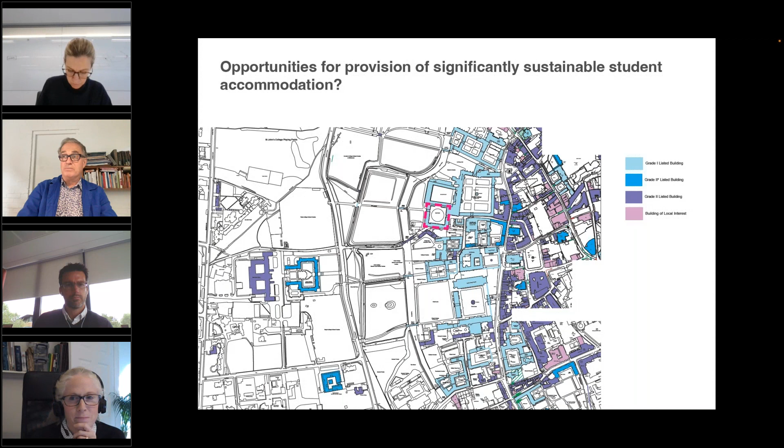So over a process of three years, we worked with the college, Historic England, and the local conservation officers to work out how you do this, what might be an appropriate methodology, how you evaluate the existing building in terms of retrofit options, and how you optimize the solutions. I'm going to give you a brief overview of what the project was about.

We wanted to provide 21st century rooms within the historic interiors—21st century in terms of expectations of character and comfort. We wanted to renew the fabric of the building, particularly the facades, because over the previous 180 years there hadn't been a lot of care applied to those.

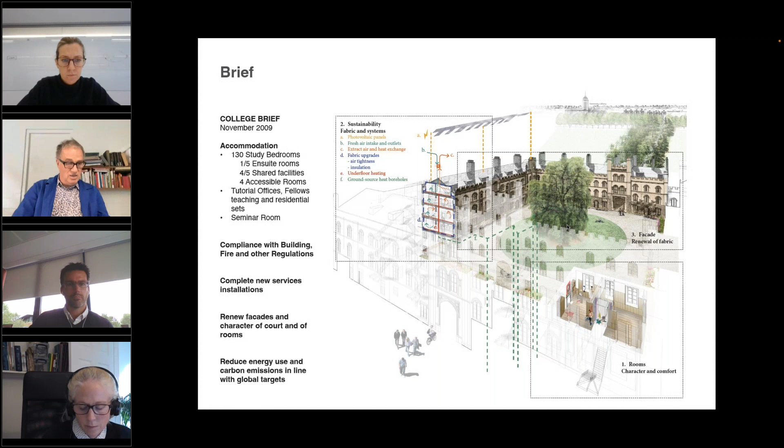But principally, the college wanted to explore the potential for sustainability of the fabric and the systems, from a fabric-first approach to demand reduction, to improving the efficiency of the services in the building, and ultimately to providing renewable energy sources.

The target we set ourselves was to take the existing carbon emissions, halve the demand through fabric improvement, double the efficiency of the system, and then halve the carbon in the supply of energy to those systems. That got us to about an eighth, which in 2010 was actually the target we were asked to aim for.

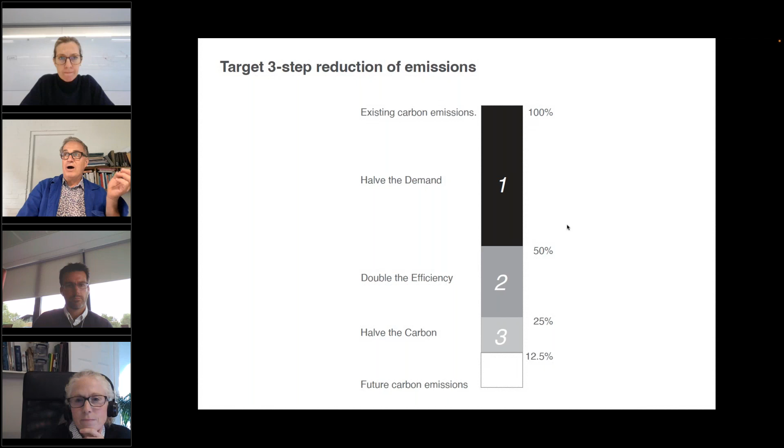The strategy, in terms of design and interventions in fabric, was to insulate the fabric, double glaze or triple glaze windows if we could, make the building airtight, but introduce mechanical ventilation with heat recovery, using the chimneys as the supply ducts to every room.

At that point, having reduced the heat loss to a point that we could heat the rooms with underfloor heating laid under the existing historic floorboards, we'd then provide heat from a ground source heat pump and borehole array. That's the bit that hasn't been done yet—the college will undertake that fairly shortly. By the time we'd finished, they were suffering from disruption fatigue, so that's yet to be done.

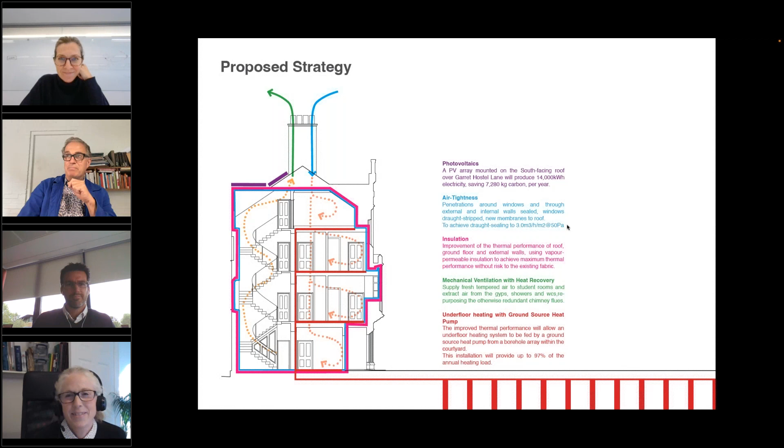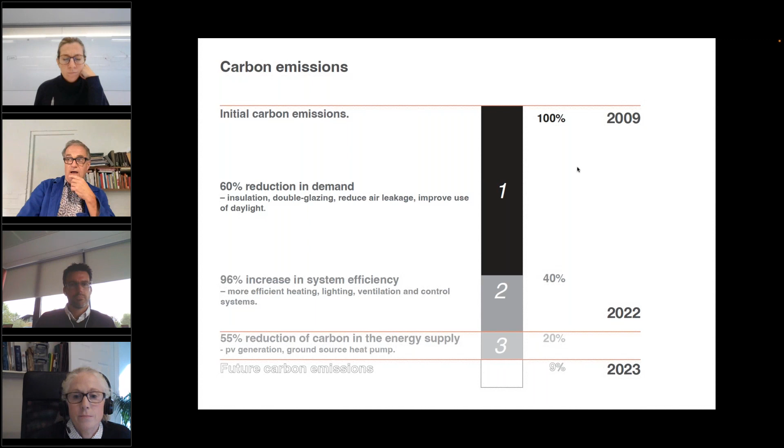What we actually achieved was a 60% reduction in demand. We didn't quite manage to double the system efficiency—in 2022 we're at something like 20%. The college have reported that energy demand and carbon emissions have been reduced by 80%. So when we get those boreholes in, things will improve even more.

In terms of other outcomes, the rooms are really popular—80% of students say they'd recommend those rooms to others, and it's the nicest place to live in college. In terms of performance—a slight digression on badges—we didn't go for Passive House or BREEAM because we wanted to really evaluate how the existing building operated before adopting targets for it.

The targets for each of those elements, walls, windows, whatever, were determined by what was appropriate to achieve in the context of the listed status of the building and the retention of as much historic fabric as was possible. So although we didn't meet the elemental requirements for quite a lot of the EnerPHit targets, in terms of outcome and kilowatt hours per metre squared per year, we're just below the EnerPHit Table 3 target. So I think badges can be quite a dangerous thing to adopt if you're retrofitting heritage.

They set targets for things which really need to be explored on an individual basis. And actually, we're finding that increasingly the targets that clients want to set are those established through SALIX, the Public Sector Decarbonisation Scheme, and there you're talking about pounds per tonne of carbon saved over a lifetime, which actually works pretty well for things with a very long lifetime, like insulation.

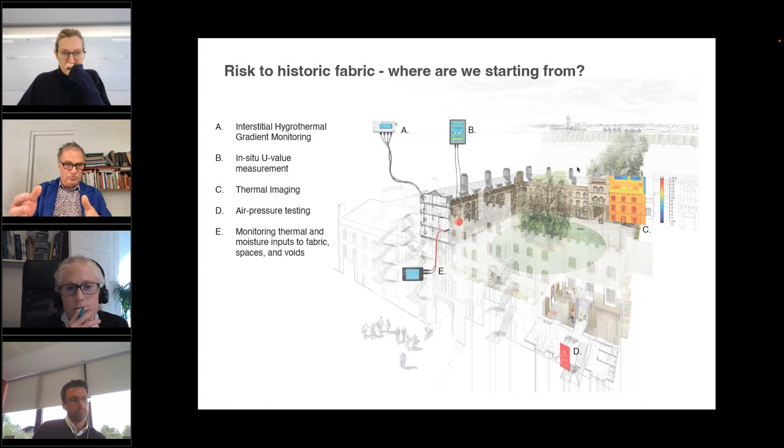And then we monitored the thermal and moisture inputs to the fabric in the rooms themselves and in the spaces between the rooms. So what happened when all the students came back, what happened when the heating went on, what happened when the students went away in the depths of winter, all that stuff. We needed to understand how that all worked.

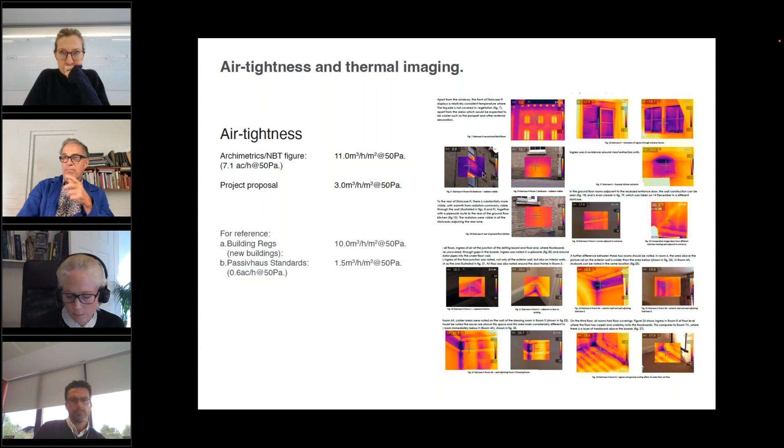In terms of air tightness, we arrived at a figure of about 11 cubic meters per meter square at 50 pascals, and we were aiming at 3. So that's a lot better than the building regs, but short of Passive House. You can see radiators through brick walls, such was the nature of the performance. But this is fairly standard thermal imaging outcomes for an unimproved building.

I think the critical lesson I learned through this was that if you do a standard U-value calculation for these walls, you come up with a U-value of somewhere around 0.95, nearly 1. If you actually measure it, you're closer to 0.7, and in some cases 0.6. So that's a 25% difference between the measured and the calculated U-values.

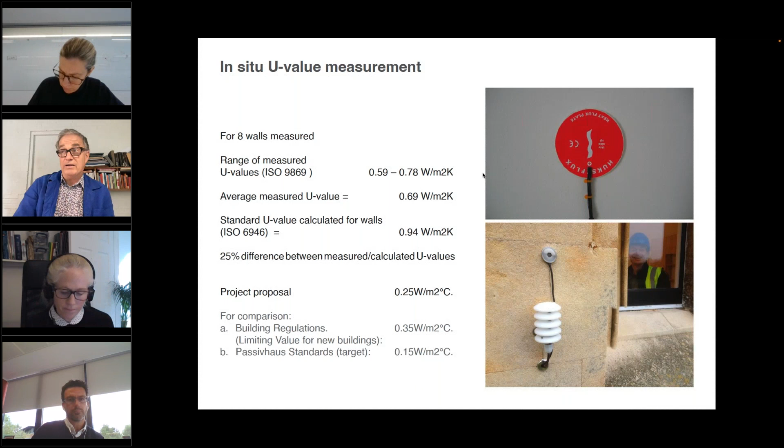And given the sensitivity of historic fabric to being internally insulated, which in this project was the only option we had, that's a big difference. You get a lot closer to your target than you would have imagined if you'd simply done a desktop exercise. You'd have put too much insulation in and incurred too much risk, I think.

The hygrothermal gradient monitoring just showed us whether we had existing dew points within the fabric, and that formed the basis of some of the WUFI modeling we did later on. I'll come on to that if we have time.

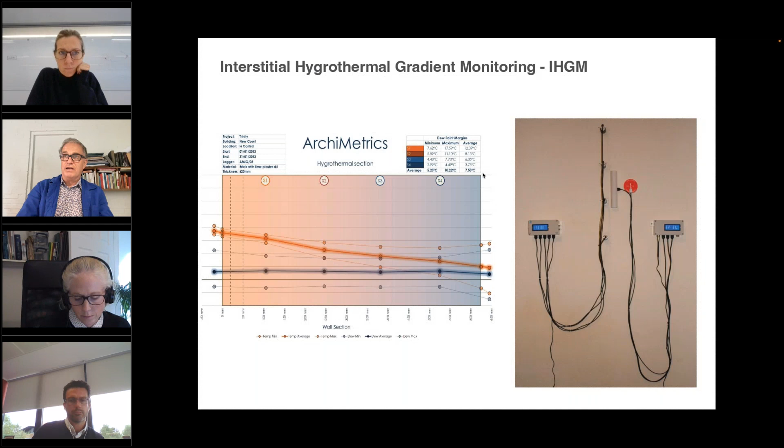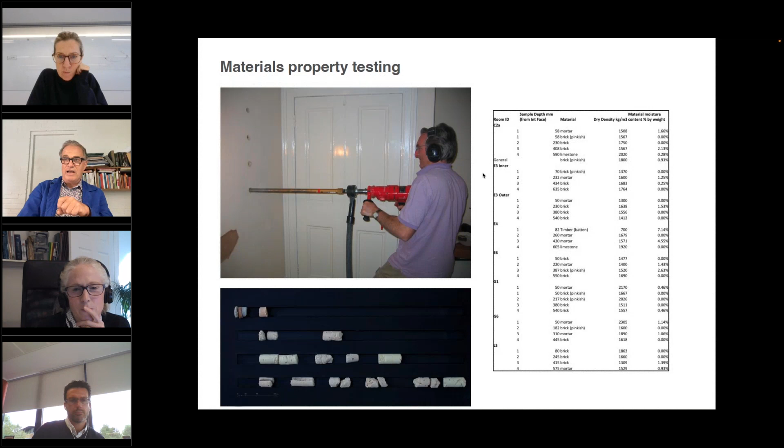Materials property testing was quite intrusive, but gave us useful core samples that we could send off for analysis in terms of the exact material properties. The input from the moisture and thermal monitoring didn't reveal anything we couldn't have imagined, but we had no way of knowing that before we did the monitoring.

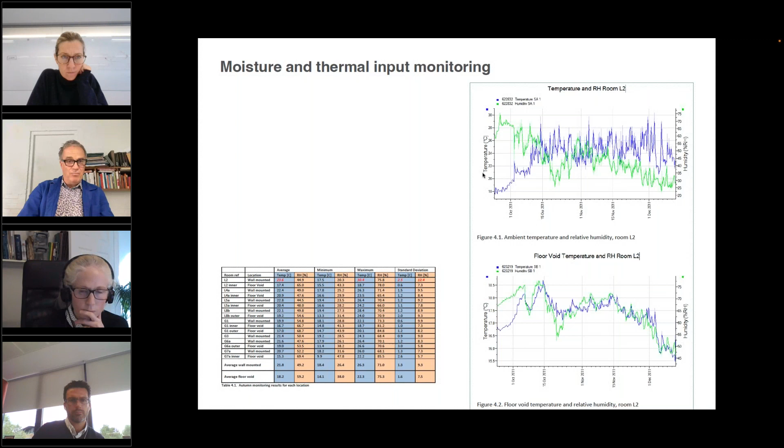In terms of the other risks, like architectural character and heritage, obviously we did all of the stuff you do in terms of looking at the fabric and the particularities of the fabric.

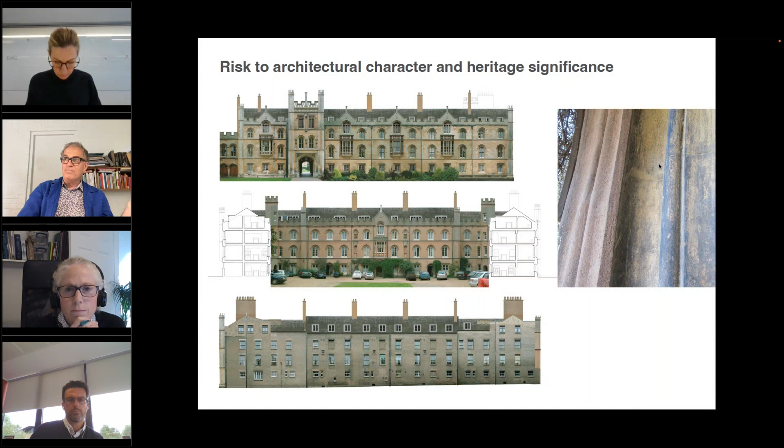This building had been over-rendered with Portland cement render in the 70s, and they had tried to match the color of the exposed Roman render, ignoring the fact that originally it had an overwash of lime wash of something much warmer in color. So we were looking to rectify that.

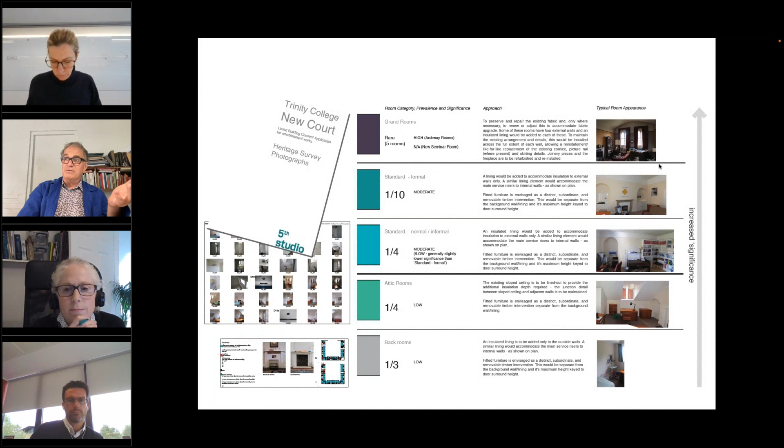We did lots of stuff you're expected to do by Historic England about features and fabric particularities, but also categorizing how many really special rooms there are, and how the largest part are pretty bog standard rooms that have been destroyed by iterative interventions. What we came to was the realization that the most important heritage significance of this building was the robust way it adapted itself to use by each successive generation of students.

So in the summer, the building would be cleaned out of all the soot of inhabitation and then occupied again. Its resilience to that kind of annual reoccupation and inhabitation by a new generation of students was the most critical aspect of its heritage significance.

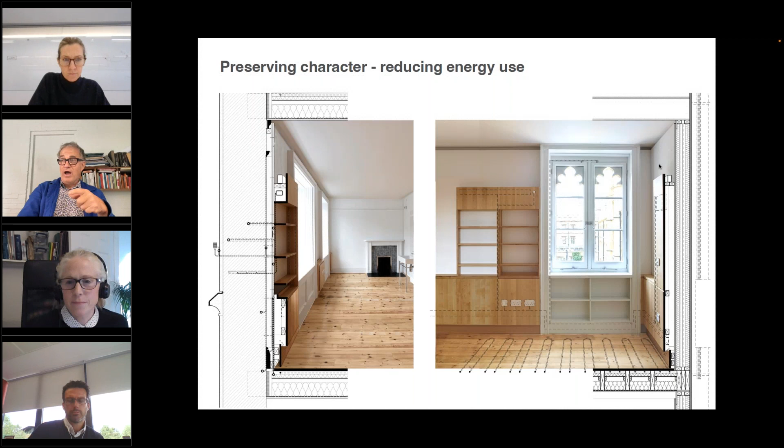Quickly, these are two photographs of finished interiors, overdrawn on the left with the monitoring stuff we built in to check that what we were doing was what we'd modeled would happen, and on the right showing the way the service installations were incorporated within the interiors.

So we decided to output the WUFI model against the isopleths for mold growth, because that was the risk we were really talking about. We were worried about joist ends in the wall, timber wall plates, a little bit of softwood grounds that skirtings were fixed to. Those were the things that would rot if we were creating dangerous conditions within the wall.

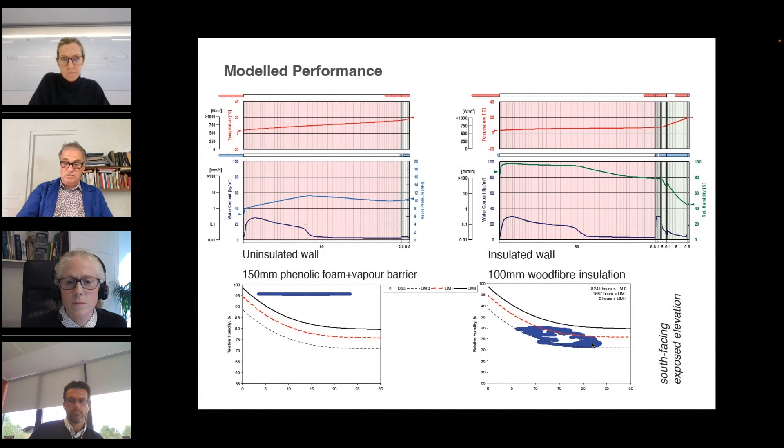So we plotted the outcomes from the WUFI model against those isopleths, and you can see that had we used 150 mil phenolic foam and a vapor barrier, we'd have been knee deep in dry rot already, possibly. 100 mil of wood fiber didn't create ideal conditions for mold growth, but was still too risky, and we ended up using 65 mil, which was then clear of these lines as kind of sensitivity.

We built a test wall, and we monitored the conditions in that just to make sure we didn't actually get a dew point within the construction, and we monitored that for a year.

The brief from the college was: we have the budget and this is an ideal building, we should do all this work and disseminate it so other people don't necessarily have to do it. This information is all available, publicly available through the planning portal.

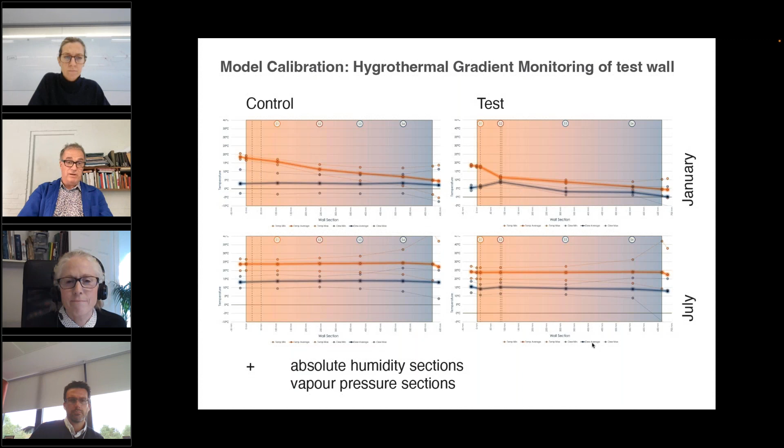This is a picture of the test wall. On the right is the insulated panel. On the left is the uninsulated panel.

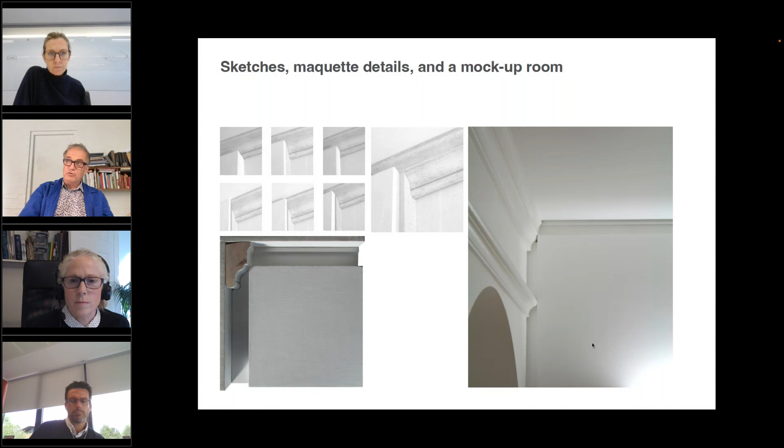We actually built a full-size mock-up room, and we built an awful lot of full-size maquettes of details for discussing with Historic England officers and conservation officers, to arrive at the idea that you left the cornice where it was. There were obviously concerns that it formed a cold bridge. It proves from monitoring it doesn't form a cold bridge, it forms a cool bridge, but not cool enough to have condensation form on it.

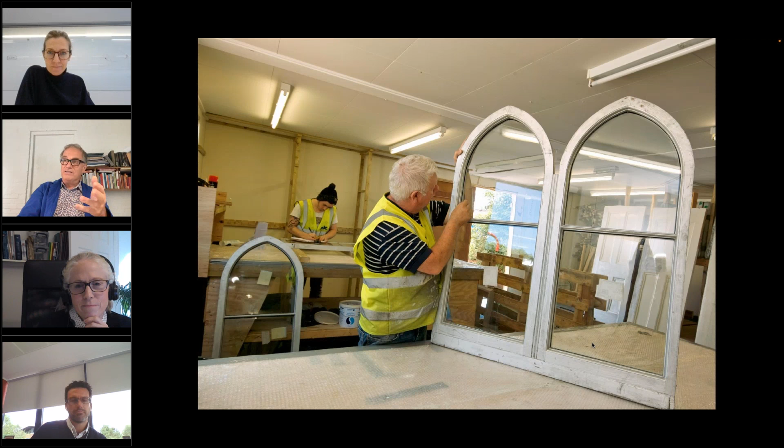We need them to do an awful lot more of this kind of thing, which is really carefully reglazing with slimline double glazing and a rolled glass exterior sheet, carefully reglazing historic timber joinery and whatever. We don't train our UK construction industry professionals to work with listed buildings and the kind of materials you need to work with listed buildings.

Lime render was complete news to them—the idea that you have a limited season in which you can use it, that it's really critical how thick a coat you apply, and so on.

It might be part of the conservation contract as well, but if you're talking about a project with 200 rooms, those guys don't qualify. So our mainstream contractors are not training their workforce with the requisite skills, and it required a huge amount of site supervision by ourselves and by the contractors. We ended up with a team that was 30% supervisors, way beyond anyone's expectations, and we had a full-time presence on site.

One of the things you hear from clients with historic buildings is, it's okay, the grid's decarbonising, we'll just shove in air source heat pumps to replace our boilers and it'll all be all right. We did some analysis, and they're right to an extent - the carbon content of the electricity now is about a quarter of what we had at the beginning of this project.

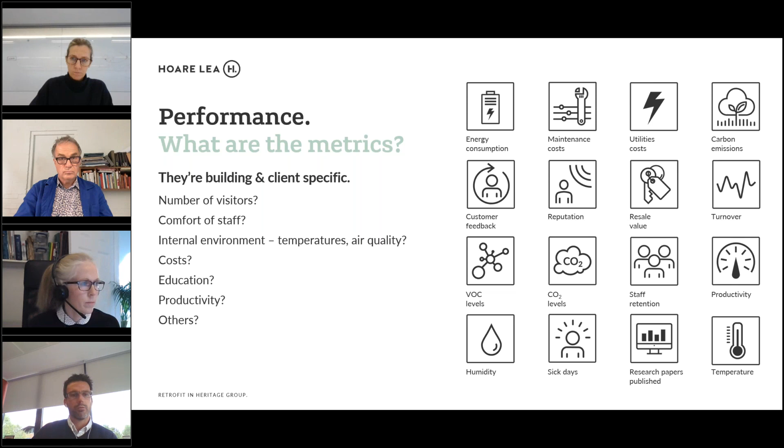So that then brings us into the wider industry perspective and how we would look at targeting net zero carbon on existing buildings.

So we're following the 5-step process set out by the UK GBC. And really what we're talking about today, the first 2 steps there, we've got the assess, which is the evaluation of where we are now, and looking at the reduction, which is the optimization and beyond.

Now it's really that second step where the input to all of these steps isn't necessarily equal. The effort, the time, the thought processes to go into the reduction stage shouldn't be underestimated. There's so much that can be done at this stage that really sets the platform for the remaining stages. So everything you can do to reduce your demand in terms of electrical and your heat demand impacts how much you're looking to generate on site, how much you're looking to source from off-site.

So really we start with finding out these 2 things. How much do we need to try reducing by? And then what do we look to reduce? So in terms of how much to reduce, we've got the industry energy targets that many people are familiar with now from UK GBC, LETI and the like.

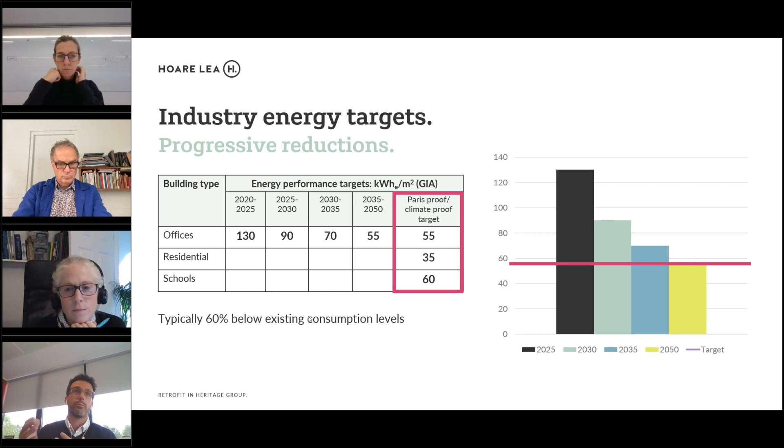These are largely sector specific at the moment and give us certainly the targets for the Paris Proof 2050 timing. With regards to offices, that's been broken down into intermediate targets, and we expect similar will come out of the Net Zero Carbon Task Force in terms of other sectors and refining some of those targets. But typically, the target levels in 2050, you're often around about 60% below existing consumption levels, and that helps to inform, if we're looking at a more bespoke building, what's a reasonable target to start looking at.

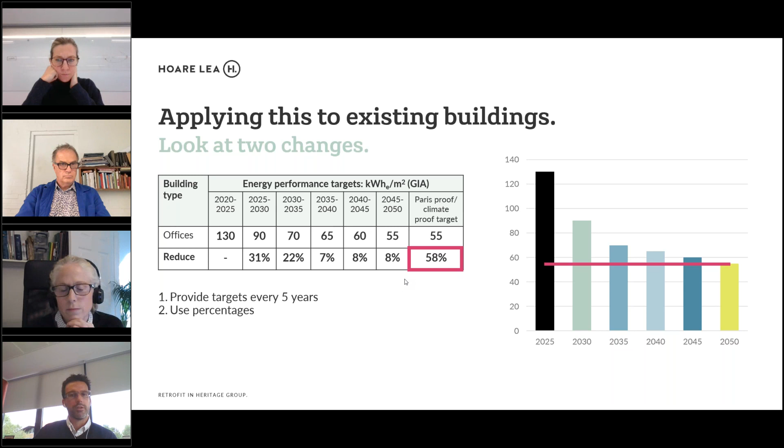So really we take the ultimate target, then break that down into 5-year targets, and by applying percentages to this, you can see that typically you're expecting to get some of the easier wins in the early years, and then you're really starting to push the limits of what's possible as you get towards that target point.

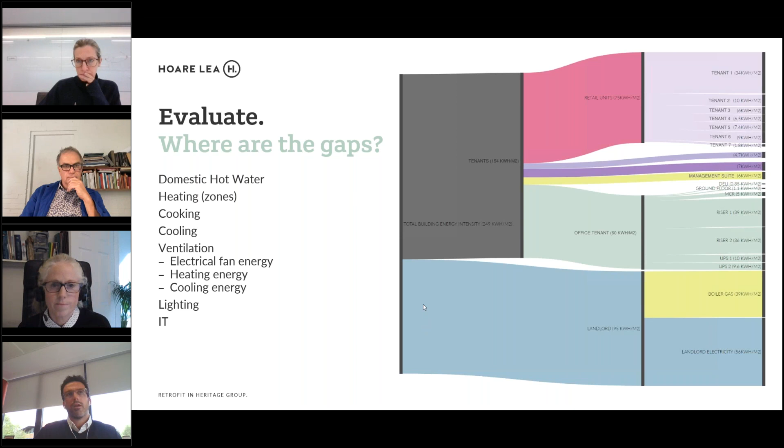So just as an example for going into a project where we want to look for that granularity, this being a typical kind of gas-fed boiler system, or it could be heat pumps, where you've got low temperature hot water feeding off to a heating circuit on the bottom there, and domestic hot water generation on the top. So quite often, particularly in some of the older schemes, you would only have a figure for consumption of the whole system. It might be a heat meter on the output from your generating plant, or it might be your gas meter on the input to the boilers.

This is where, in the evaluation stage, we would look to apply further metering, or as that can be quite disruptive particularly in heritage buildings, even just clamp-on temperature sensors on the pipework can give much better granularity on where the heat's being used and when.

Typically, if you've got overall system consumption, you'd want to measure your heating system's consumption separately. Rather than just take the difference between the two, it's best to apply a meter on the domestic hot water generation, and one that's often missed is a meter on the cold fill to the hot water, so you can quantify exactly how much water was used in the hot system and the heat input. From there you can understand your circulation losses, storage losses, and whether a different solution might be more efficient or reduce energy consumption.

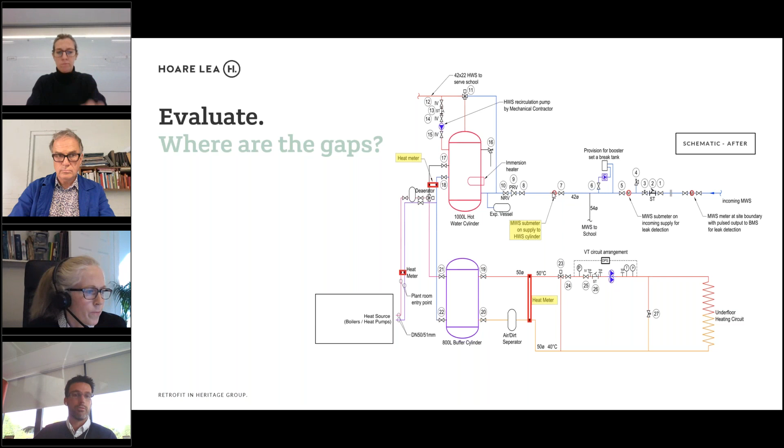The other side of the analysis is the massive benefit of half-hourly data, if we can get hold of it. It's typically quite readily available now, particularly for utility gas and electrical supplies. So particularly if you've got a gas-fired heating system, or heating and hot water, if you can get the data from the utility supplier, you can quickly conclude how the building is using the heat available to it, and how often it saw peak loads. This kind of analysis really informs decisions later on about main plant sizes, maybe sizing modular plant.

In this particular example, we had a scheme with gas boilers of 1,750 kilowatts installed. From the data, we could see that the peak output for the system was only ever up to 770 kilowatts, significantly less than what was installed. Actually, for 98% of the time, the building was looking for heat at 450 kilowatts or less.

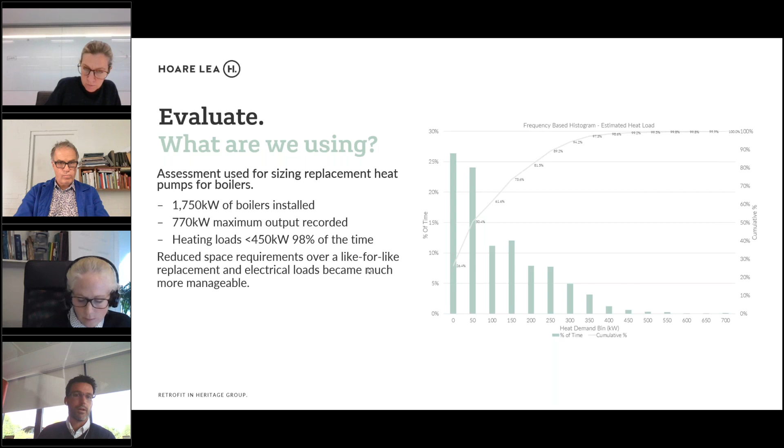That can help inform replacement plant sizing, particularly important now when we're talking about heat pumps on buildings, electrical supplies, and space for air to flow around the heat pumps. By taking this approach, you can reduce space requirements to something much more manageable instead of going for a simple like-for-like replacement, and the electrical loads become much more manageable. Both of these points are very key particularly for heritage buildings, because space restrictions for heat pumps and airflow could really be a driving factor in what you're able to do with the building.

So then tailoring all of this to heritage buildings - probably making a few sweeping statements here because they are all very bespoke - but in terms of our experience of what you might typically expect, your typical baseline may well be quite low consumption compared to other sectors of buildings. There's not often that much process consumption within them, and lighting will often be quite old and may even be heritage listed.

In all those instances, there should be good opportunities to install low energy replacements and still be sympathetic to any heritage requirements. A lot of the buildings may well be naturally ventilated with reduced or minimal cooling needs, down to the way they've been built with increased thermal mass, small windows, etc. The big exception we see is libraries and museums, where conditions are very tightly controlled, and that's a real area for focus on optimization, checking whether those tight controls are working as they should be or fighting each other.

Typically you might expect gas consumption for the heating and maybe quite limited domestic hot water in the building. Going alongside nicely with some of the things Oliver talked about, the typical fabric will often have single-pane listed windows in place, and you want to look for opportunities to replace with double glazing if possible, or consider whether secondary glazing is feasible.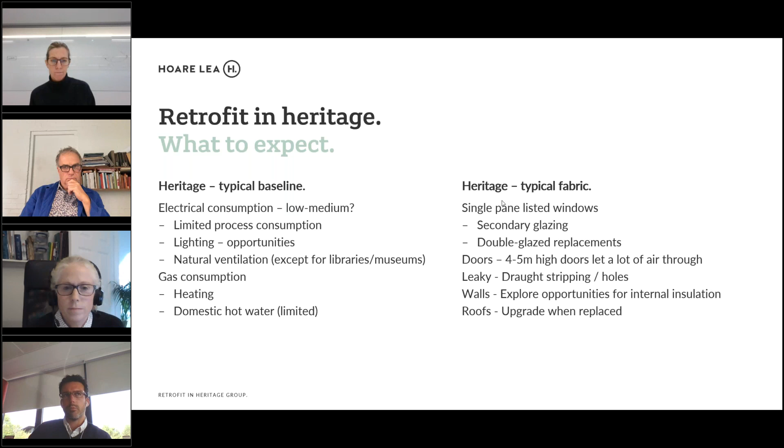In terms of how we would then approach an optimization and improvement project on heritage, on the elemental side we've touched really on the heat loss reduction from the fabric and infiltration, and so seeing what's possible on the fabric side.

In partnership with that, or sometimes instead of that, is looking at the scope for increasing your heat emitter sizes or types. Where you've got systems with smaller radiators at a high temperature gas circuit, you want to look at introducing lower temperature plants such as heat pumps working with larger emitters. The pipe sizes and routes can factor in massively on some projects and dictate the services solution, where heritage limitations on the fabric mean you can't take certain routes or install certain types of emitters.

When it comes to the main plant and what we'd be looking to do in terms of a decarbonised solution, air source heat pumps would always be given consideration, and this is where we appreciate that the limitations for a heritage building can be quite restricting on this option.

We've seen in those instances ground source heat pumps can be very applicable on heritage buildings, because they have limited impact visually and on the fabric, obviously looking for the external space to put the heat rejection and gains from. In the longer term, not necessarily as a short-term solution, consider whether you might replace some of the existing plant with hydrogen or biogas boilers if and when the technologies become suitable.

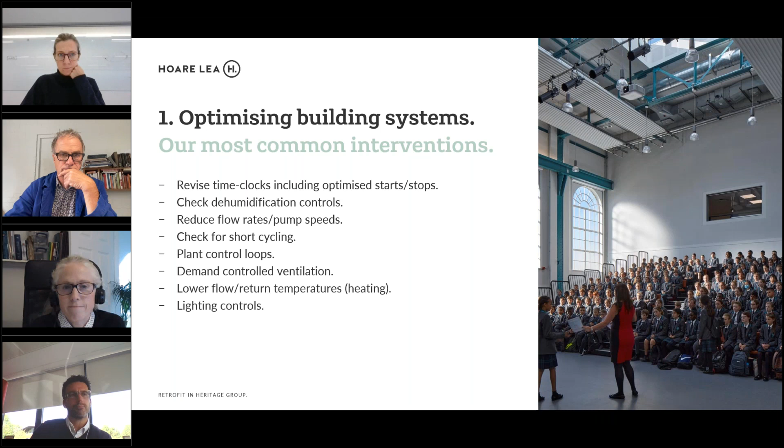Then when we move on to replacing what's inefficient, pumps and fans are often the first place to look, looking at how old those are.

Lighting, as I've touched on before, there should always be some good opportunities in there. And then in terms of tempering the people and not the space, it's really looking at where the people are in the building at various times. So not heating the whole building all the time if you know people will be in one space for the morning and move into another later on.

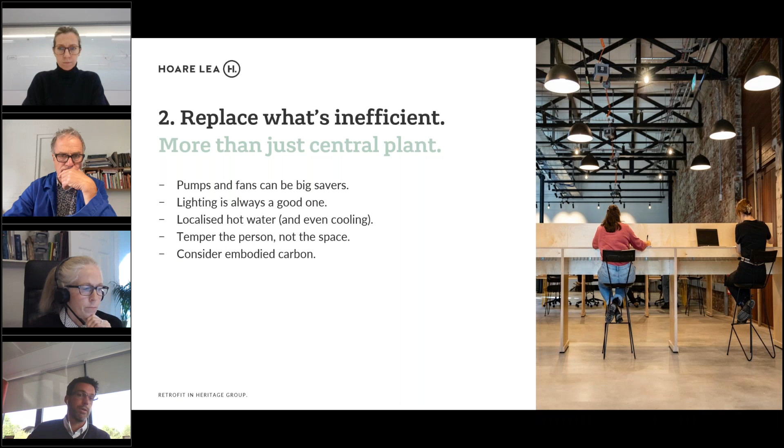This is quite common in schools and education establishments. Likewise in entrance areas for schools and the like, it's really just trying to heat the staff sat in those spaces rather than trying to heat the whole space where external air may be coming in and replacing quite quickly.

And then just in terms of reducing what you need, largely what we've talked about in Oliver's presentation - seeing what you can do about insulation levels, glazing, checking risks around cold bridges so you're not creating problems down the line, adding shading where possible, and relocating some internal uses. For example, your high IT intensive areas, moving them away from south facing facades to avoid the additional need for cooling. Considering remote working, and also the IT strategy of seeing where those main IT uses are now and whether they move off-site as a better solution.

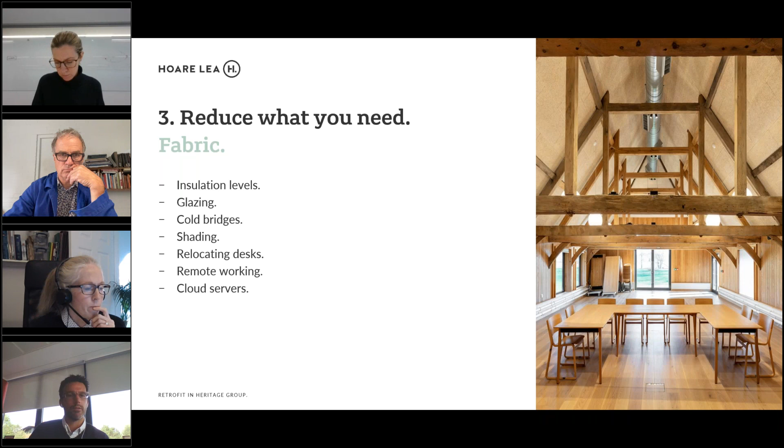So that concludes my part of the presentation. Thank you very much, everyone.

Thank you, John, another really interesting presentation there. I think it's so interesting - the more post-occupancy evaluation studies undertaken, more and more reporting that the systems are just very rarely operating at the capacity they need to. So it just proves the importance of doing these evaluations. And I particularly support the point about those easy wins in the short term for the client and occupier to see the immediate benefits.